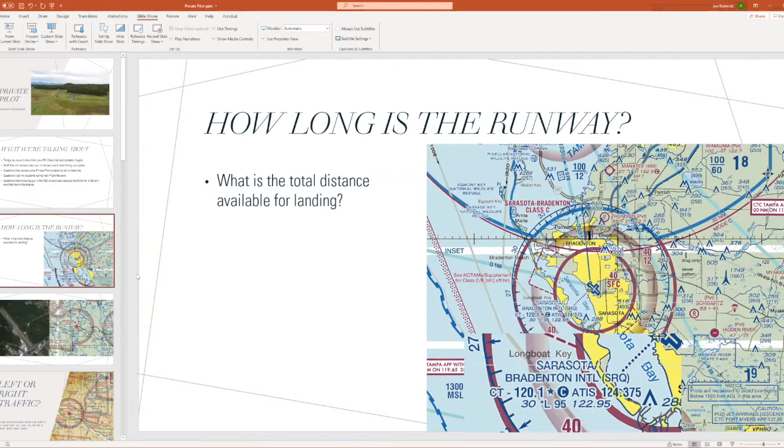So little things that can get you - it's the length of the longest piece of pavement at the airport, it doesn't mean it's the distance available for landing. A little asterisk that none of us ever really bother to read on the side of that sectional chart legend when we're looking through all that stuff.

So any questions on that one? Well, the displaced threshold is often paved. Right? It is paved, but you wouldn't want to use it for landing necessarily, right? You're not supposed to, certainly - not supposed to. Yeah.

The reason a displaced threshold exists in the first place is there's going to be some sort of an obstacle. They don't just put it there and say, hey, if you can land before this thing, great. We don't want you using this much for landing, so we shorten the runway. The problem isn't that the runway can't support your weight in a Cessna or a Piper, it might be that this part of the runway can't support the weight of a landing aircraft.

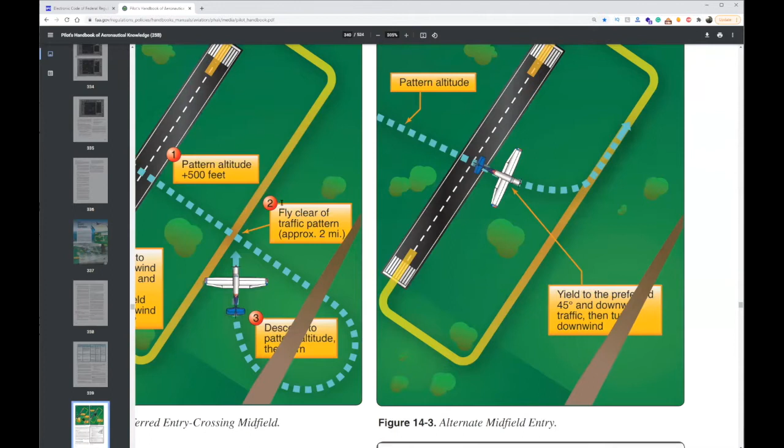And we'll get the screen swapped over here. That would be this guy. So believe it or not, the FAA somehow or another approved this as a preferred method, or alternate midfield entry. So hopefully that's legible enough for everybody. This is what we're used to: we fly over the airport at pattern altitude plus 500 feet, we come back around with a 45-degree entry into the left downwind.

Alternatively, you enter at traffic pattern altitude and cross over the field at traffic pattern altitude, and join from the inner part of that downwind at a 45-degree angle.

And why? I guess perhaps for everybody flying around that can't see that windsock quite as well, you get to be 500 feet lower. Maybe you're already low doing that. But this is an approved way to enter. In my personal opinion, it's not something we really teach students, other than we just teach them to watch out for it, because it is an approved way, but it's not necessarily the most sensible or safe way to go about joining the traffic pattern.

So that's something we see a lot of, more so up in Alaska. People like to fly low. Rarely do you see anybody flying more than 1,000 feet AGL anyway up there. So that's a more common way that they approach runways up there.

And possibly, if you're at super high density altitudes, you might see some of that in Colorado in the summertime, where guys can't climb - it would take them all day to climb an extra 500 feet above pattern altitude. So they're just cruising along at 1,000 feet AGL.

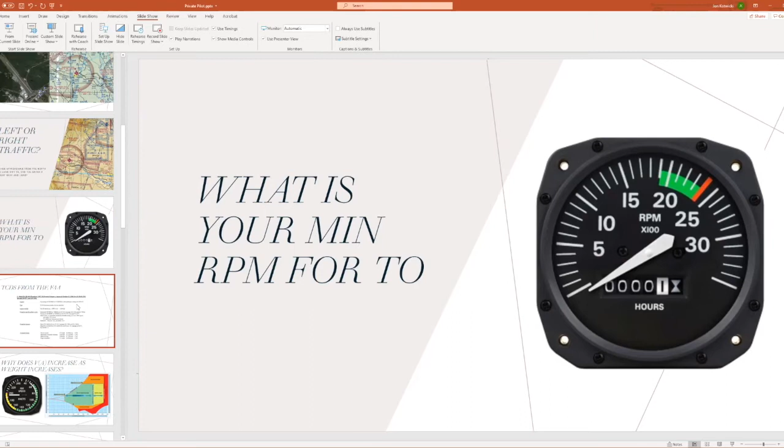And for any fixed pitch propeller airplane, they'll always give you a range. So where we're going to find this is on the TCDS, the type certificate data sheet from the FAA. You'll find this for any certified airplane. For this particular one, I just pulled up a random TCDS, and this one applies to a PA-28, a Piper Cherokee, 160 horse.

It tells us it's approved for these airplanes from 1960 onward for these serial numbers. It gives us a serial number range and tells us, hey, this airplane's built with a Lycoming O-320, and it has these carburetor settings you could find in a carburetor manual, and this is the fuel it needs. For all operations, never exceed 2,700 RPM, which would give you 160 horse.

And then it'll tell you, based on the type of propeller you have, a Sensenich 74-inch DM or 74 DM6, and that starts referring to pitch and these serial numbers on the propeller, then your static RPM is going to be not over 2425 and not under 2325. And it'll say right there, no additional tolerance permitted, diameter of the prop.

And props vary in diameter. It might start off as a 74-inch propeller from the factory, but after some nicks and dings and some filing at annual, after 20, 30, 40 years, that prop might be a little smaller. And they say, hey, this prop can't get any smaller than 72.5. We don't want anything more than 74, because based on how much that nose strut compresses and the clearance between the propeller and the pavement, we need it to be no more than 74 inches unless you're going to upgrade your tire or put on a bigger nose gear.

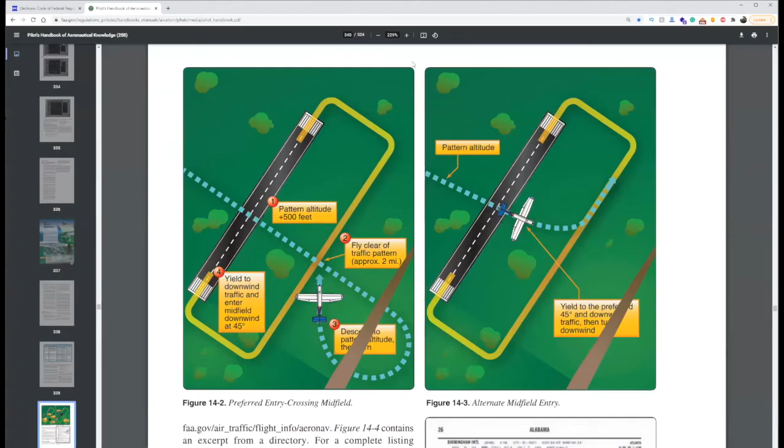And if for some reason you do all this work, you pull up the TCDS. How you do it is as simple as going to Google and typing in FAA TCDS—it's a little bit of a process. I'll share this window here. So what I'll do is go to Google, type in FAA TCDS, get to my RGL, rgl.faa.gov, and search by make, my type certificate holder.

I'll say I want a Piper, or even a Cessna—which is really weird, it's under T because it's Textron. It's actually not Cessna; Cessna's been out of business for a long time. We go Textron Aviation, and now I say okay, I've got a Cessna 172N. I click on that and it tells me my TCDS number is 3A12.

And guess what, 3A12 is the exact same TCDS number as a 172B, because when I click on 3A12, it brings me to this page. I click on this link, revision 85, and you'll see that this applies to the 172 all the way through the 172S—going back from the very first one in 1956 all the way up to August 14th, 2019. So this covers a lot of different 172s.

If I just scroll to a random one like a 172C, here it's telling me propeller McCauley, and I've got all these different options for my propeller. Then I've got another propeller for the seaplane only. And then I've got a propeller instead—McCauley, Sensenich—and different RPM settings for each.

So that's where it becomes pretty important to actually look at this thing and make sure, hey, I still got a Continental O-300 Charlie or O-300 Delta on there. Of course, if you've got a Lycoming O-360 on this airplane now, all bets are off. You'd want to go talk to the STC holder to say, hey, in your testing, what changed here?

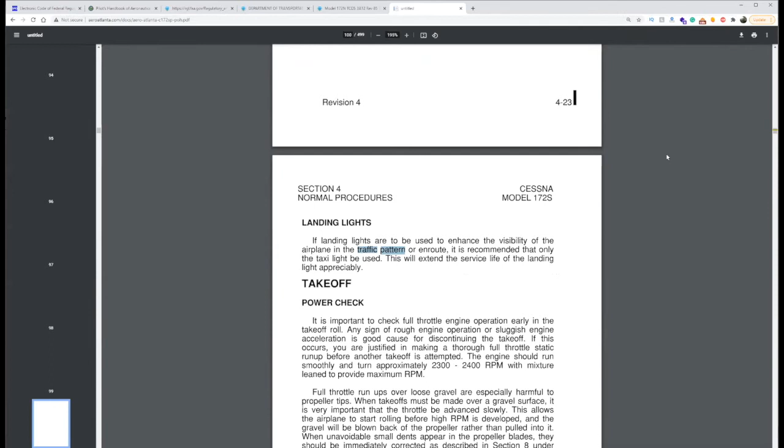If you're flying a 172, you probably know your best speed is up around 8,500 feet. You'd think you could just keep climbing higher and going faster and faster, but that doesn't really work with a piston naturally aspirated engine. They make best power with a whole combination of things at a certain altitude. I'm trying to find the cruise performance chart to use as an example, where it'll show you your best speed is going to be right around 8,500.

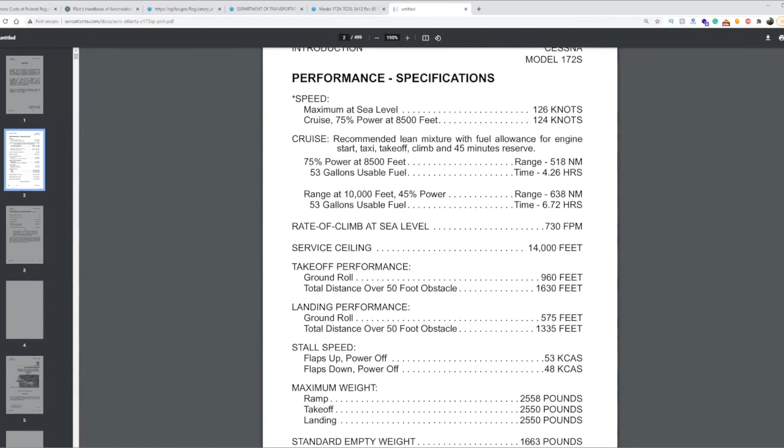But all that aside, yes, static RPM will absolutely fluctuate with density altitude. It will always be in that range on up to your service ceiling of 14,000 feet. If you're trying to take off at 13,000 feet density altitude, that's highly unrecommended. But if you are, you should still be making that minimum static RPM, despite the fact that the engine isn't getting a lot of oxygen and isn't making a lot of power. There's also less air for that propeller to push against and less resistance for it, so it all kind of balances out. That's why there is a range there. If it didn't matter based on density altitude, they wouldn't give you a range, because 180 horsepower should always be 180 horsepower. But that's why we're getting those ranges.

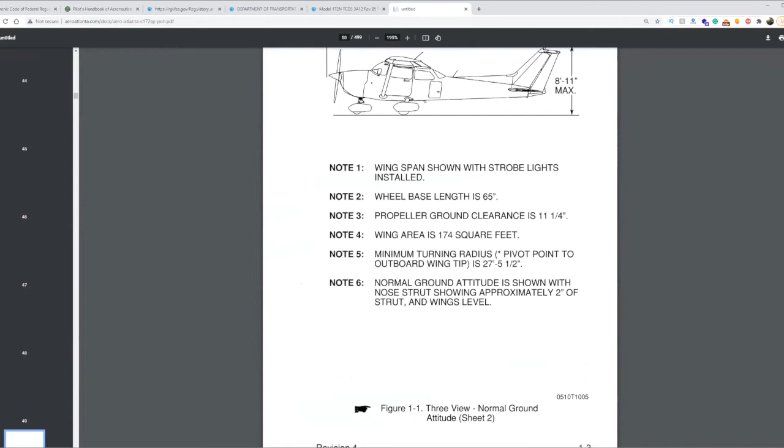Any other questions on static RPM?

So if you were to have a turbocharged fixed pitch airplane, you'd get a higher RPM turning at a higher altitude on static, if you're running the same manifold pressure. Say you're turbo normalized, you would expect, as temperature or altitude increases, to see higher RPMs with the same manifold pressure setting. Of course, if you're boosting to like 45 inches at sea level and only boosting to 40 inches at higher density altitudes, that's different. But if you're always boosting to the same manifold pressure setting, say always 30 or always 40, then you should see higher static RPMs with the fixed pitch prop at those higher altitudes.

And ultimately, this is just about knowing if your engine's doing what it's supposed to. It could be running smooth as can be and not making full power.

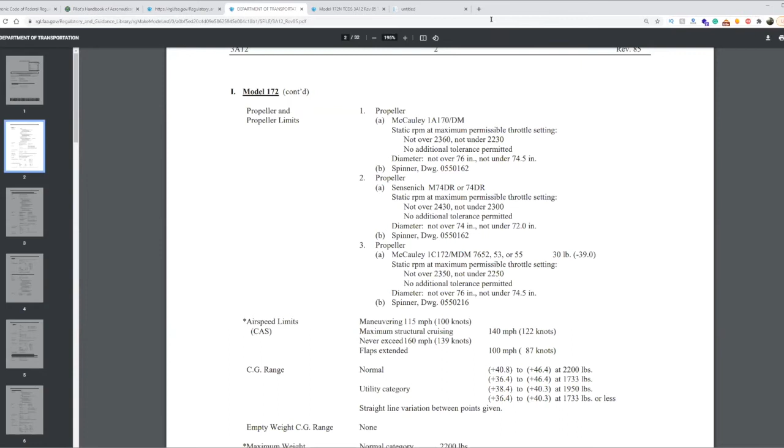A good example of this is we did an accident case study on a Mooney that Fly8MA -- I should be able to spell my own company name, right? -- owned.

And of course, I'm not going to be able to find the video now. But there was a Mooney that ran off the runway, and that guy, ultimately, should have known all along, because he was never making full RPM. They knew he wasn't making full RPM because there was a video involved, and they did sound spectrum analysis. For those of you who weren't here earlier when we talked about the weekend video, or the Alaska weekend video, this was another one we did up there of a very, very fun weekend. So if you guys are bored with the winter and not doing much flying, this was another one of our weekend outing adventures up there.

But that aside, let me find this -- I've got the Mooney video, I'll put it in the chat. So you think an aborted takeoff is super easy? Oh, okay, somebody found the video.

This is that Mooney pilot who, sadly, realized it too late -- he actually tried to abort way too late. All the way down the runway, he should have been making 2,700 RPM. He was making like 2,400. It was an issue with mag timing and just a tired engine overall, and it was a constant speed propeller. So again, constant speed propellers should always be turning their max RPM -- they should always be turning up at 2,700. There shouldn't be so much fluctuation there. The prop governor should take care of it.

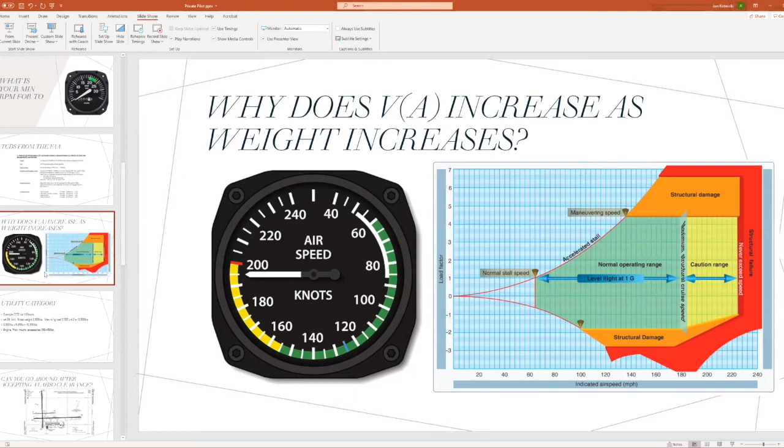So at the end of the day, there's a lot of different ways to explain it, but ultimately, the lighter you are, the more you're going to get tossed, the slower you want to fly. So if maneuvering speed is 115 knots placarded in your airplane, that is likely at gross weight. If you're flying below gross weight, you need to slow down well below that.

So if it's 115 knots and I'm flying at any arbitrary weight, say 2,000 pounds, I need to fly below 115. Say my maneuvering speed becomes 102 knots—I need to make sure I never exceed that. So I might target 85 or 90 knots going through pretty heavy turbulence, so that as my airspeed fluctuates plus or minus 10, I'm never going to exceed my maneuvering speed.

If you want to calculate maneuvering speed, think back to that math when we were learning about how doubling our speed gets us 4 times as much lift.

So for twice as much speed, we get 4 times as much lift. How do we figure out what maneuvering speed is in aircraft that don't have this placard? Perhaps it's an experimental aircraft, perhaps you're flying a kit fox. What is your maneuvering speed?

Simple as this: what's your stall speed? If your stall speed is say 40 miles per hour in your kit fox, that means at 40 miles per hour I get 1 G loading. So if I go ahead and fly at 80 miles per hour, I'm going to get 4 G forces, 4 times as much lift when I double my speed. That brings me right up to about my 4.2 G limit. So my maneuvering speed just became 80 miles an hour.

So if you're flying that 172 that says VA 115 knots, but you're flying it 500 pounds under gross weight, go up there and test it. Get nice and high where it's safe, practice a power off stall, and look at what your true airspeed actually is when you're stalling, not indicated. Indicated's not going to be quite right, but get your true airspeed as you're stalling the airplane and double that. That's a safe number to target or try to stay under when you're going through heavy turbulence if you're flying below gross weight. Any questions on that?

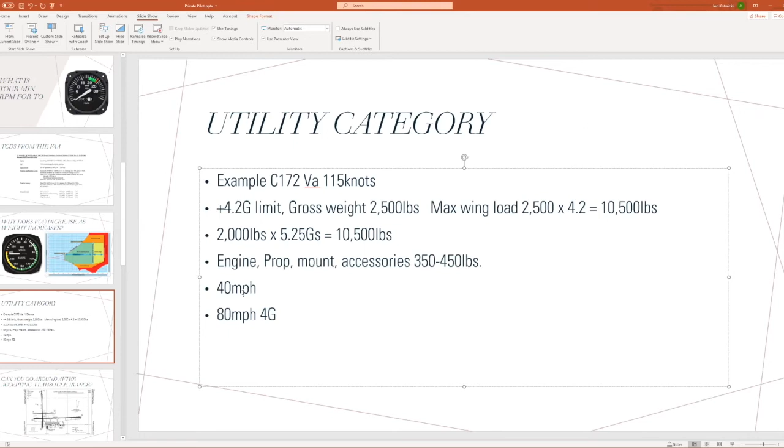All good? No questions? Cool. We'll move on to the next one here.

Can you go around after you accept a land and hold short clearance? So this example here, we've got Pueblo Memorial Airport, and they have land and hold short operations. Looks like landing runway 26 left to land and hold short of runway 35. And if you're landing runway 17, you might land and hold short of runway 26 right.

So if you are on downwind and the tower says Cessna 12345, clear to land runway 26 left, land and hold short of 35, and you accept that, and you're coming down and you're floating and you're like, I don't know if I'm going to make it, and you're getting knocked around by turbulence, but they've got traffic coming in to land on 17, and they're counting on you landing and hold short of runway 35. What happens? What can you do if you're right there? Can you go around at that point, or do you have to land the plane?

I would say you've got to do what you can do safely, do a go around. Yep, and so you can still go around even if you accept a land and hold short clearance. They would much rather you, once you realize hey, I floated a whole bunch, or hey, it's too burbly to land, they don't want you to force a landing and wreck the plane, or to try to land long and end up squealing your tires right through and stopping right in the middle of the intersection where that other guy's landing. They would rather you go around and only cross that runway for just a brief second, going 70, 80, 90 miles an hour in your go around, and then simply enter the pattern. As always goes, you aviate, navigate, communicate, you clean up the airplane, you add full power, you get established in your climb out, and then you notify the tower as soon as you can that, hey, Cessna 12345 is going around.

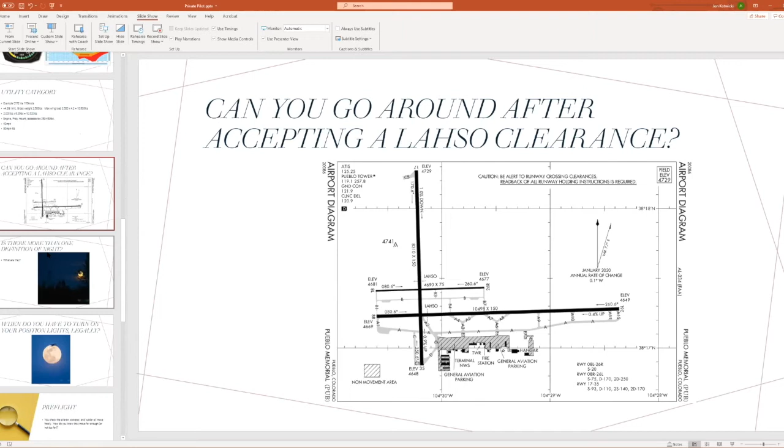So a little story, a little embarrassing story from back in the day, 10 years ago or whatever.

So the other comment I wanted to make was that as the PIC, the regs kind of go out the window if flight safety is involved, right? I mean, if you're going to crash and die trying to follow the regs, you as the PIC have the right to do whatever you need to do.

Oh, absolutely. Yep. And I mean, if they don't want to give you an intersection departure or they don't want to give you full length, you can always say, no, I need it. And it might be a little delay, but you'll get it. If you take off and you can't make it back to the runway, but you can make it onto a taxiway, great, I mean, who cares? Like, I don't care about any airplane I fly. They can all be replaced.

And so, yeah, I mean, just always do what's safe and what makes the most sense. Never try to save a plane or try to make somebody else's life easier and load yourself up with a big workload or stress. Typically doesn't go over so well.

A big one with that is trying to expedite off runways, especially with tailwheel airplanes or even just 172s, expedite, get off the runway immediately, expedite next taxiway. And people turn off too fast. They wind up tipping over, dipping a wing, or they can't make the turn. The brakes aren't as good as they thought, and they slide a little bit and they run off, hit a taxiway light or something. And the FAA pins it on you. They're not going to pin it on the controller. So always do what you got to do to fly safe and keep safety the number one priority.

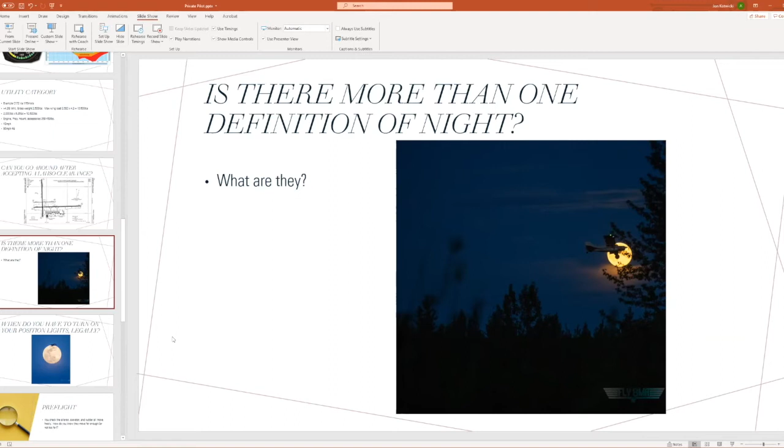So civil twilight is when we're going to log nighttime, and then sunset is when some other things happen there that we'll talk about in the next question here. And then with the 1 hour before, 1 hour after, of course, is when we can log those night currency landings. Talking about another nighttime reg here. When do you have to turn on your position lights legally, your navigation lights?

I think it's actual sunset. Yep, at sunset, exactly, right at sunset is when you want to turn them on. It's a funny question to ask in Alaska because people are like, navigation lights, what are those? Most people fly just in the summers up there and it never gets dark, so it's never an issue. But the actual reg for your position lights is going to be sunset.

How about this one? This one is a little bit more interesting. We all pre-flight our airplanes, we've all moved the ailerons up and down, we move the stabilator, the elevator up and down, we move the rudder left and right. We check the flight controls, make sure they're free and correct and all that good stuff. How do you actually know if they're moving far enough? How do you know that aileron is moving up and down as much as it's supposed to? How do you know it's not moving up and down too much? They go to the limit. Okay, how do you know that the limit is set correctly?

Because it's checked at annual inspection, okay, and it usually has some kind of set on it so you can have a witness so you can tell if it moved or not. Gotcha. And how do you know that the A&P did their job? Or the IA did their job? If you truly believe it.

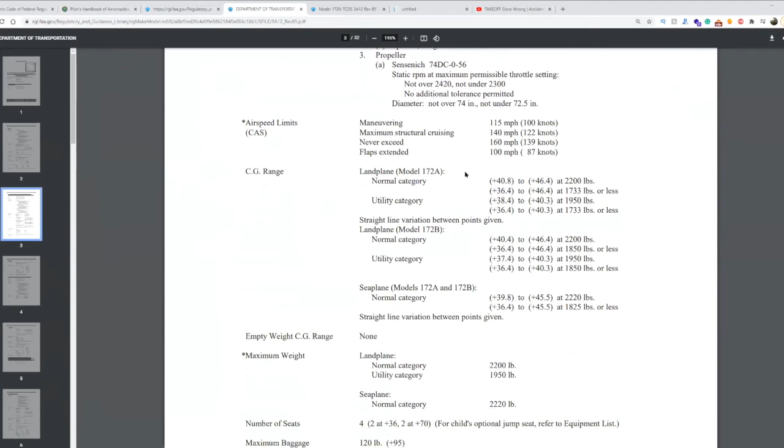So the type certificate data sheet is a pretty useful document to get familiar with if you haven't already, for your particular airplane. It's a short read—for your airplane it can be like 2 pages at most, and you might find some cool things in there.

Any questions on that? I'd make a comment. Not to give a plug to a competitor, John, but the Pilot Workshops Real World VFR had a monthly issue a number of months ago about misrigging after maintenance, where somebody taking off very close to O'Hare Airport in Illinois, near Chicago, found out they had reversed controls. So what to do was the question they talked about.

Yeah, that same thing happened. A Spirit Airlines pilot down in Florida spent years rebuilding a Cub, and on his first flight he killed himself, pushing that stick as far forward as he could trying to get the nose down. Flight controls were reversed.

So I've gone through phases—I'll admit there's been times where I do a flight control check and I just kind of look at the shadows on the ground and see the controls are moving. I don't physically look back there and check. It's an important thing to check. You can say, oh, I flew the airplane earlier today, earlier whenever, but if you do the exact same thing every flight, it's really easy to do the exact same thing every flight.

Obviously, if you just fly out for a $100 hamburger and walk back to the airplane an hour later, the flight controls are not going to be reversed. That doesn't mean you shouldn't do the same check you always do and visually check when you're in the cockpit—turn your head around, twist in the seat, do all that stuff to actually see. Just be in that habit, because there's been times I get into an airplane that's just come out of maintenance, and if I'm not in that habit, I might forget to do it.

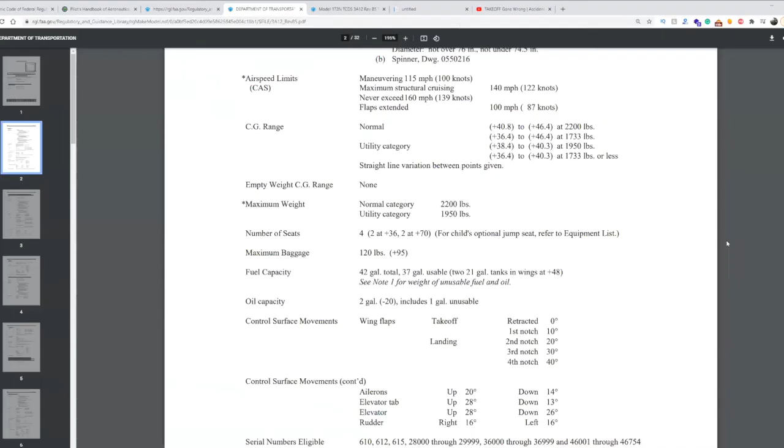Mark it as inoperative. It would have to be marked as inoperative, but this is where it gets a little tricky. Different FSDOs, shocker, have different interpretations of this. Isn't that wonderful that we as pilots get to deal with not always the most complete or really consistent regulations.

So inoperative instruments and equipment, we come down here and what we'll find is this is where they get hung up, that if deactivation of the inoperative equipment or instrument involves maintenance, it must be accomplished and recorded in accordance with Part 43 of this chapter.

This is where they're getting a little confused. They're like, well, if you pop a circuit breaker and zip tie it, that's considered maintenance to deactivate that landing light. So it must be accomplished in accordance with Part 43 of this chapter. Part 43 of this chapter is the maintenance section.

By the way, ecfr.gov is what I use all the time, because your paper FAR AIM, that's out of date the moment they print it. ecfr.gov, obviously its website's updated all the time.

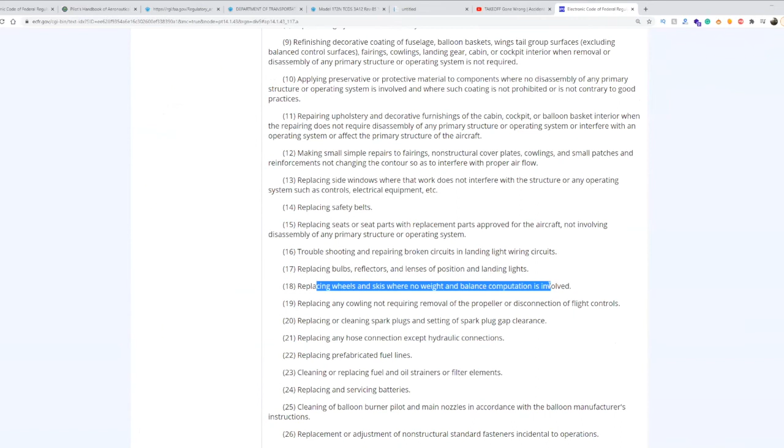So if we look at Part 43, we're all familiar with preventive maintenance, and we come down here to Appendix A. When we come down to preventive maintenance, it covers about 20, 30 things that says we can do, like replacing bulbs, reflectors, and lenses of position and landing lights. We can replace wheels and skis where no weight and balance computations are involved. Shockingly enough, we can replace seat belts.

I feel like somebody that's really proficient in doing that should do so. We can replace landing gear shock cords. We can replace tires. Nowhere on here in preventive maintenance does it say that we as pilots can pop a circuit breaker and zip tie it or collar it.

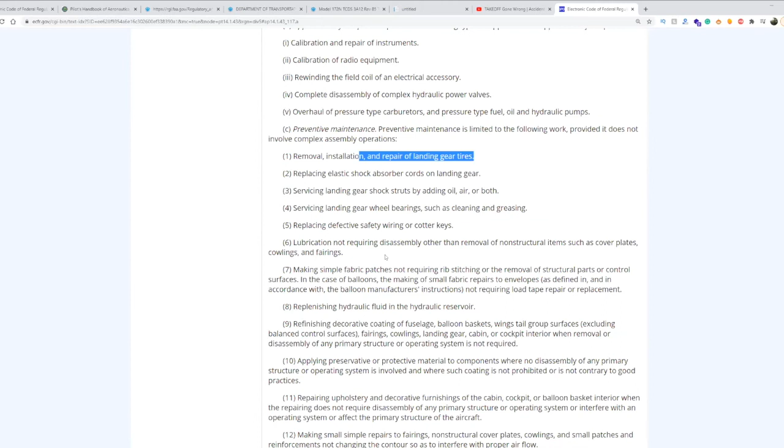And so some FSDOs decide that, oh, for anything that's inoperative basically on your airplane, there's no way you can legally fly that airplane without getting a mechanic out there to do X, Y, and Z, or at least sign it off. He signs off that he's done that, and he finds the aircraft safe for flight and records that maintenance in the logbooks in accordance with Part 43 of this chapter. I got burned on my commercial for that exact question.

And what's so sad is that some DPEs in the country would tell you you're totally wrong, no, you can totally do that yourself, you know, you can do that yourself. Other DPEs will tell you, no, you have to get the mechanic involved. It varies around the country. Obviously, the safe way is get the mechanic involved.

Now, the best answer to this particular question is forget about deactivating it. Go replace the bulb. If you got an extra one on the shelf, you can replace the bulb yourself, and you can record that maintenance in the logbooks yourself under preventive maintenance. But you can't go fly it with a burnt out light bulb yourself, which is kind of the goofiness of it.

But as we all know, the FAA is not exactly known for making sense all the time. So just something to keep in mind, especially when you're chatting with your friendly FSDO buddies about broken things on airplanes, or people are listening, make sure that if you know the right way anyway, you can at least say the right thing and not get burned on stuff, saying oh yeah, I just fly with it, it's been burnt out for weeks and I've been flying, and somebody goes, hey, you're not really supposed to do that. They're not looking to take anybody's certificate over stuff like this, but it's best to do it the right way.